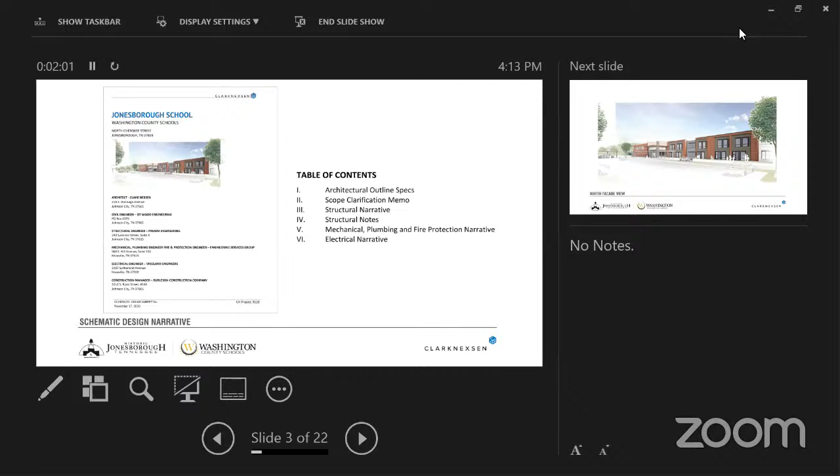Can you go to the next one, Shelby? Okay, this is the north facade exterior rendering that I think we showed you last time. It helps you see the shape of the building and how we tried to copy downtown Jonesborough, the way the buildings are offset and some taller than others - we tried to incorporate that. The shape is good. We're still working on some details like brick patterns and the cornice detail at the top, and we'll be developing those as we go into design development.

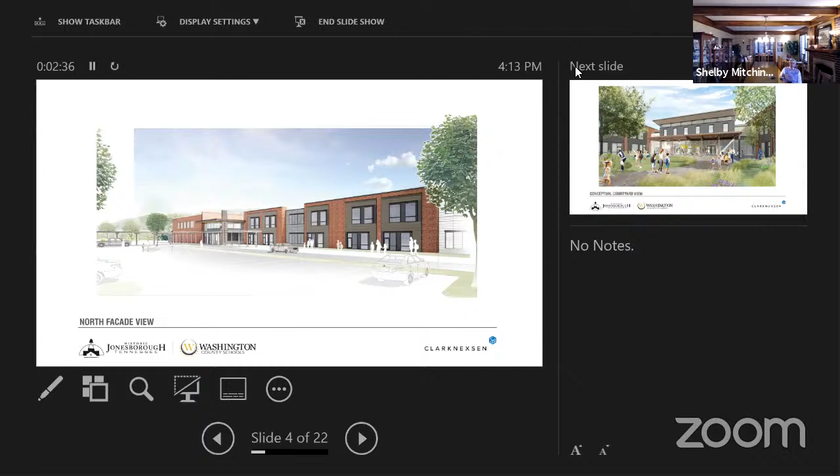Next, this is the courtyard rendering that we've shown you before, to show that the courtyard will be used for activities, teaching spaces, learning spaces. Those are not weeds that you're seeing that it's overgrown - we're using sustainable design, which Jonesborough has done a remarkable job using, and we intend to use sustainable design in landscaping for the school.

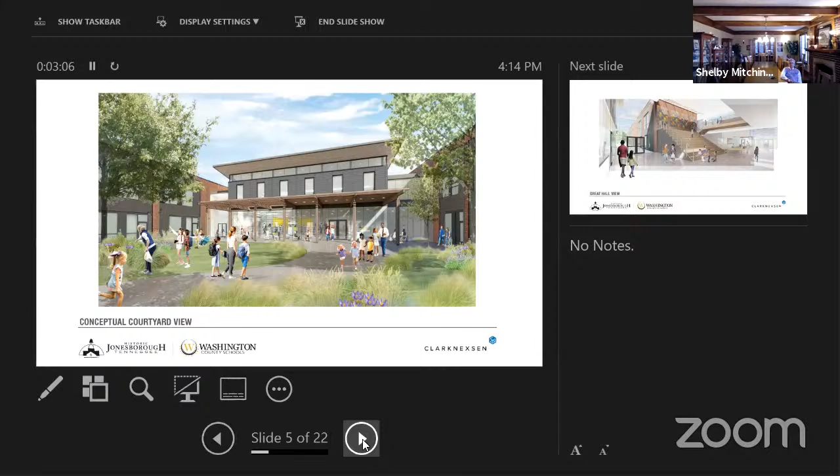Next, this is the Great Hall view that you've seen before. To give you a little input on the elevated section there, we're actually calling it similar to courthouse steps, like you'd see at the courthouse downtown. We've gotten feedback from Jordan Hughes, the principal at Boones Creek School, and from other schools, and they have high praise for that aspect of the design. They use it for a lot of events, and it can also be used after hours for community use. You might notice the colored pieces at the top of the bleacher or courthouse steps - those are acoustical panels. We'll be using acoustics in this area so you can have an event there even during school hours without it bothering the rest of the school.

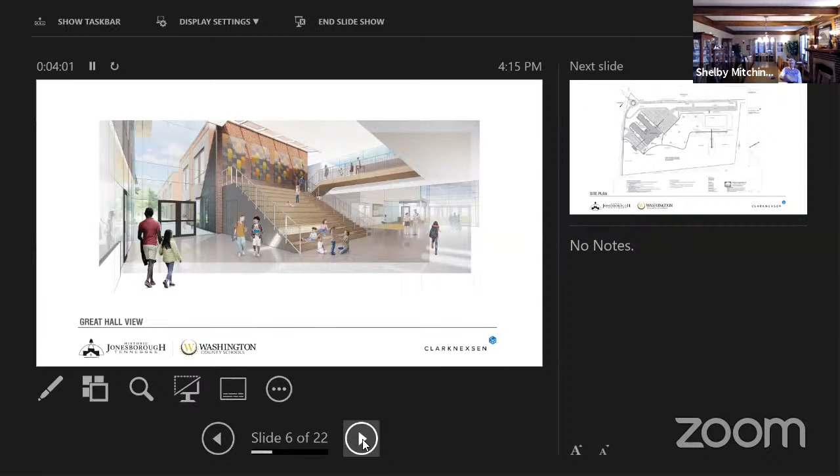This is the overall site plan. We're just now getting into developing it, but we wanted to show you this is the basic layout that we'll be using with the school, the parking, the access, the athletic fields, the agricultural building, the trails and so forth. And we're very happy to let you know that at this point, there are no retaining walls at all in the development of the site.

Also, it's probably a little difficult to see, but we did rework the entrance drop-off drive to line up directly in front of the front door. So we're now getting ready to go into full development of the site plan in this next phase.

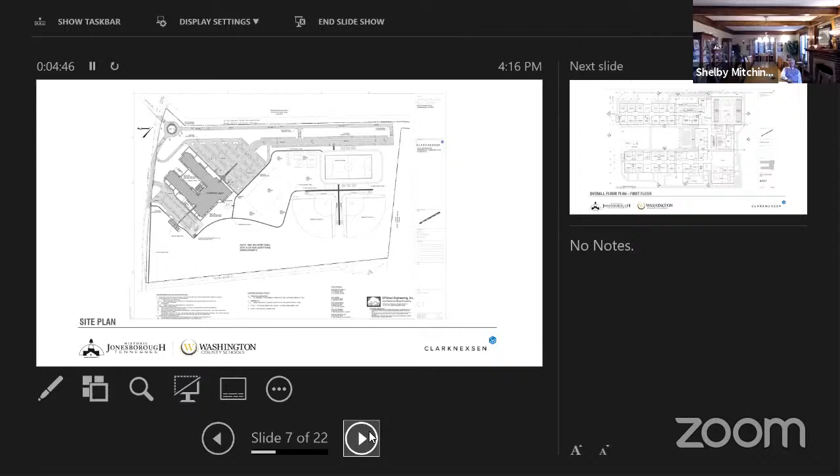This is the overall first floor plan of the building. We wanted to show you this one. It's a little more difficult maybe for you to read, but we wanted to show you what goes into a working type drawing of the floor plan with the column lines on it, dimensions on it, section marks, elevation marks, and so forth. So we're just showing you this to show you how we develop the floor plan as we get into the hardcore drawings.

We will be able to explain it a little further when we get to the colored floor plans in a few minutes. They're a little simpler to read.

This is the overall second floor plan with the same markings on it to just show you what we're putting on the floor plan drawings when we put it out for bidding.

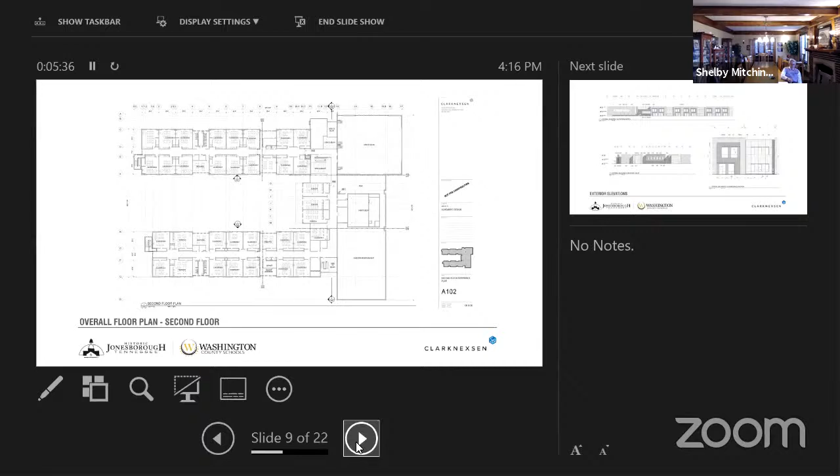This is the exterior elevations of the building. Again, it's a little more difficult to read than the colored renderings, but again, it just shows we put the column spacing and the bays, we put dimensions, we put additional information that helps the builders when they look at it to be able to price it and see what sizes everything is.

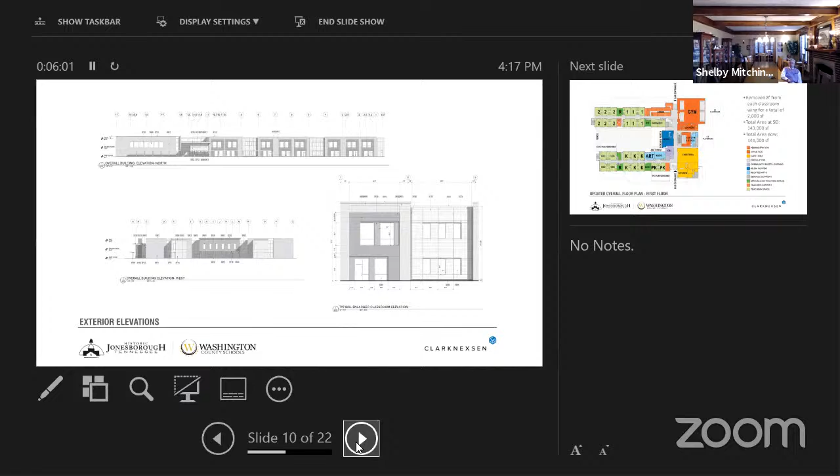This is the overall first floor plan, and it's in color. It's a little easier to read. Since our last meeting, we were able to remove 8 feet from each classroom wing. That saved 2,000 square feet. So now, instead of having 143,000 square feet, we now have 141,000 square feet.

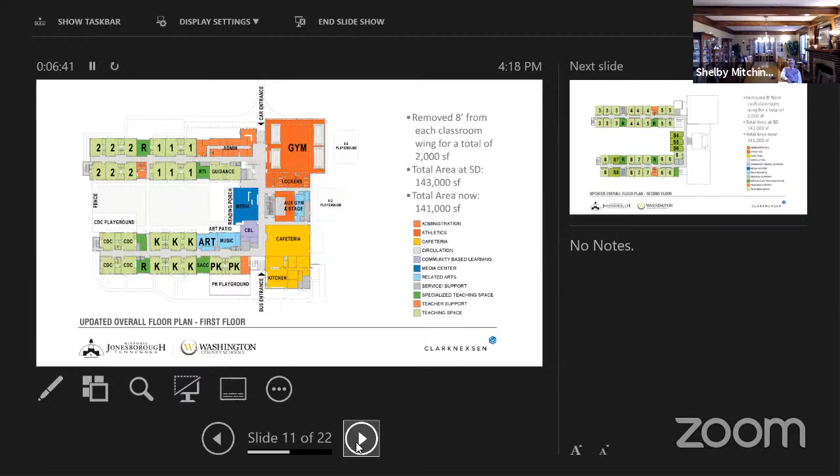In a few moments, we'll show you how we were able to do that and still keep the same teaching spaces in these classrooms. But this is what the overall floor plan looks like on the first floor. We tweaked it somewhat, and we'll show you more of that when we get to the enlarged sections.

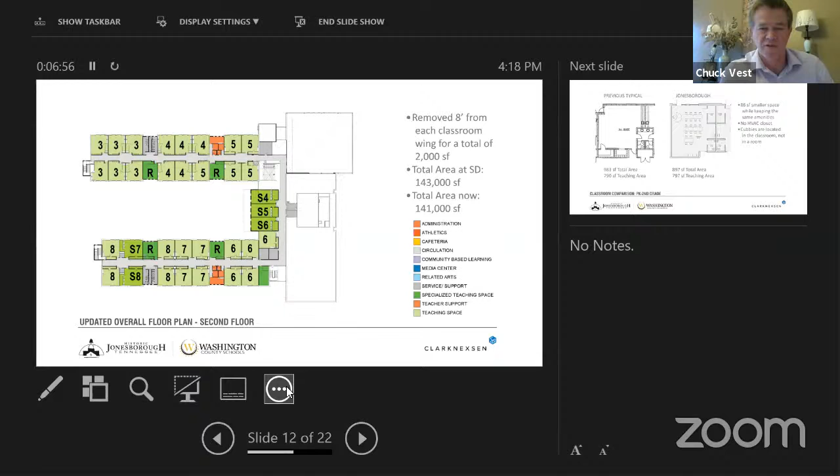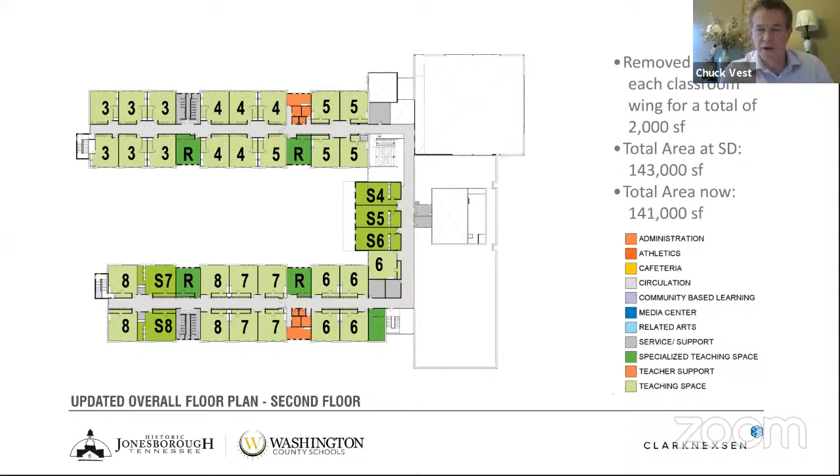And again, this is the second floor wing. Overall floor plan shows how we tweaked it, and it shows the same savings, because when you save it on the first floor, you also save it on the second floor.

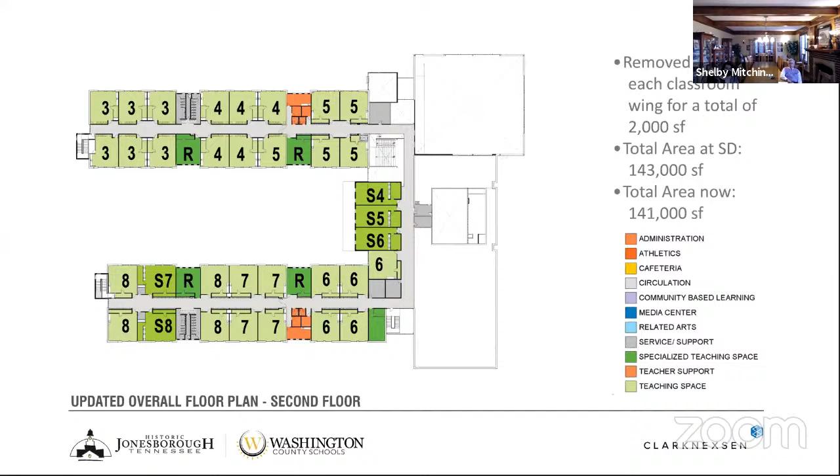We wanted to talk a little bit about the classroom comparison. The one on the left was Boones Creek School. First of all, I want to say this in no way is being critical of Boones Creek School. We're just using it as a comparison because it's the last school that was built in Washington County, and it is an excellent school and an excellent design. We're just trying to see where we could save money in some sizing and sizes.

And if you'll notice on the left, that has 983 total square feet, and you have 790 square feet of teaching area. We reworked it to the one on the right that is now 897 square feet total area, but the teaching space went up to 797 square feet of teaching area.

The reason that we could do that is that the HVAC closets or rooms that we had on the left next to the toilets, we were able to eliminate those with the HVAC system that we have. We also took out the wall at the cubbies so that those cubbies could be right directly into the classroom. And without having a wall there, we gained some space, and it allows the instructor or the teacher to observe that more closely instead of letting them get behind the wall.

Something else that helped us in reducing the space is the thickness of the walls. By going to the drywall system, metal studs and drywall, our walls are not quite as thick as those with masonry. So all of that combined, we were able to reduce square footage and yet have more teaching space, the same amount of storage space. We also gained a little space by the individual toilets opening into each room rather than opening into an access way or hallway for the toilets. We feel this is a very good design that helped us reduce the square footage.

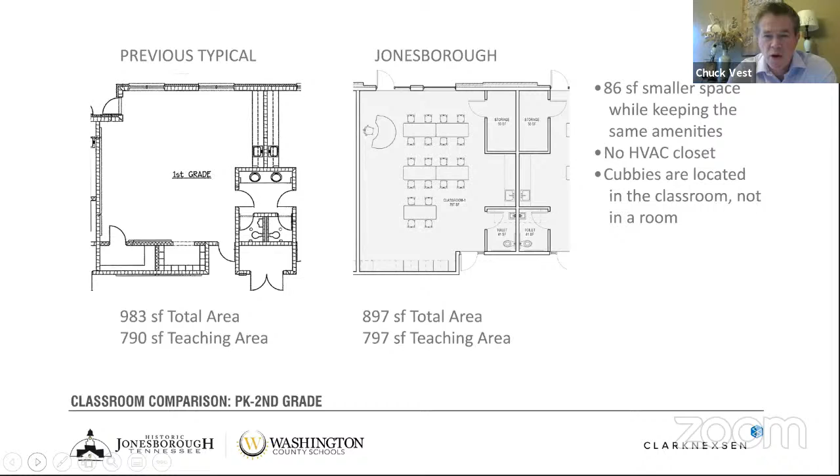That's a good point, Rob. Thank you for that. Ken, let me say, you and your whole team, it's these type of things that are really impressive. But switching to that damage-resistant drywall, does that have some acoustic positives as well? Because I know when walking through some of these schools that are mostly cinder block, it just seems like the sound echoes. Is this drywall system really going to improve in that area?

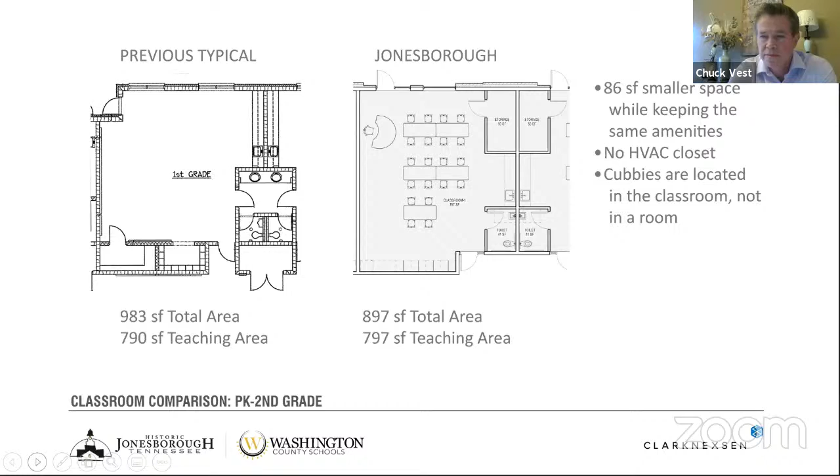Yes, it will increase the acoustic value of the classrooms. We also are putting insulation in those walls to even help further with the acoustic value. So we have improved the acoustic value.

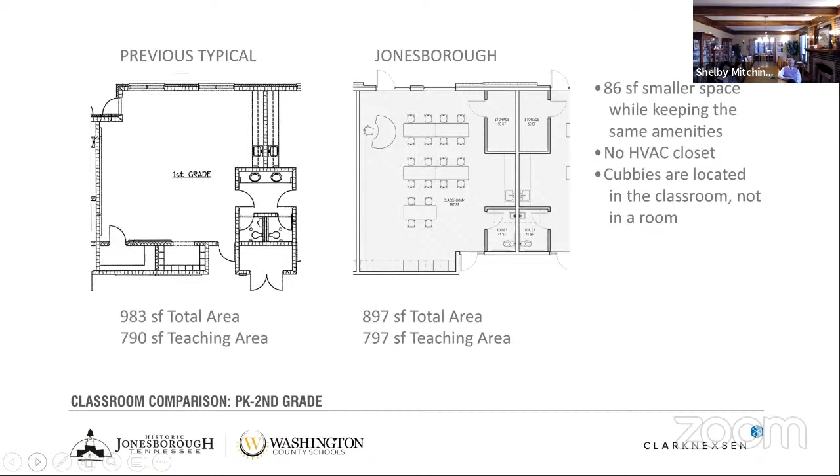This is the classroom, first floor, the first and second grade units. As you can see, they're very simple. We did do a layout of the desks just to show that they fit. We will work with the teachers as we get further into it about the exact arrangement of the desks and the teacher's desk and so forth, but just to show you that it works. The spaces are pretty similar now, except we refined them, improved them. And we did put the corridor in the middle there going to the courtyard, which will help the teachers or administration cut through to the other wing without having to go all the way around the building.

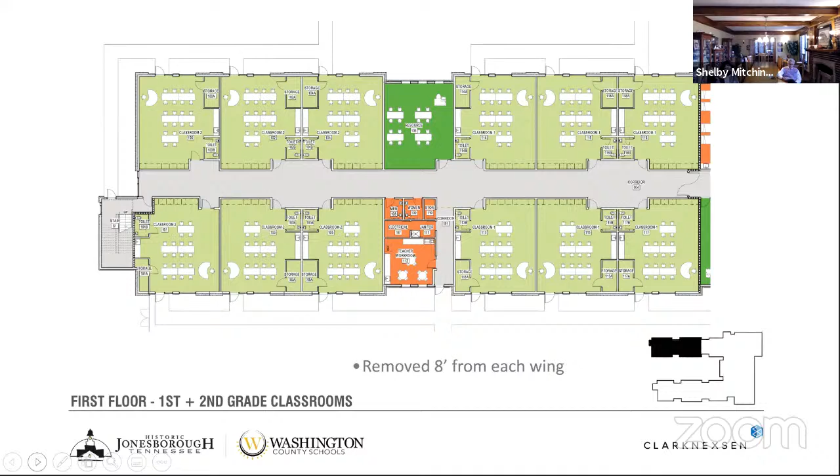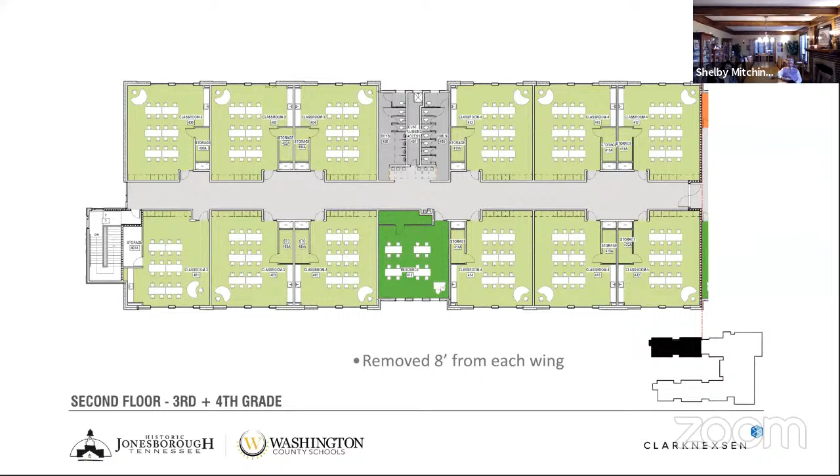Next, this is the second floor, the 3rd and 4th grade. Again, you can see how simply it's working out, how well it's working. Basically, we've simplified it, improved it, and took 8 feet out of each wing. This is

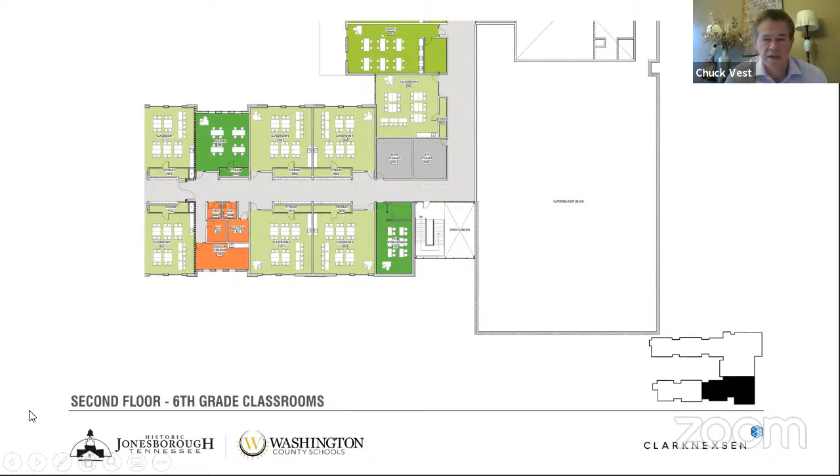Hey Ken, do you mind if we stop right here and ask any of the members if they've got any feedback on anything they've seen so far? Sure, that'd be fine. Okay members, does anyone have a comment or a question on what you've seen so far?

I've got a question. Can y'all hear me okay? Yes. Okay, sorry, I've had audio issues before. I know we talked 2 or 3 meetings ago about the possibility of moving concessions to where people working concessions can actually see the ball games and stuff like that. Have you guys looked into doing that with any of these designs and updates?

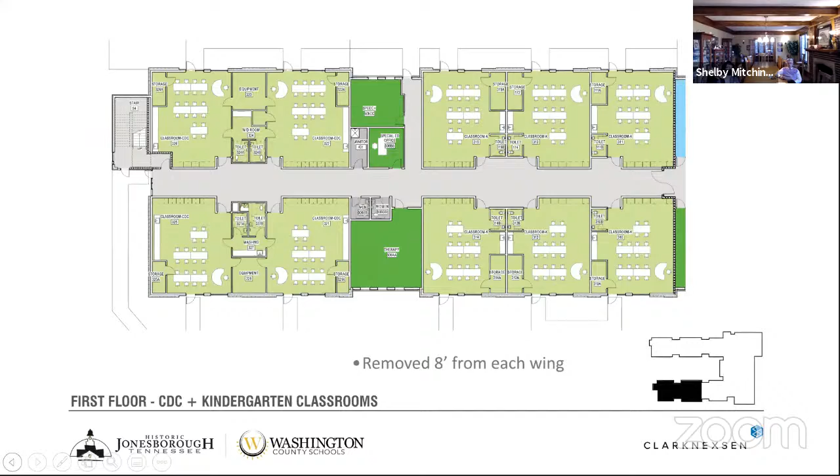Hey Brian, I want to add something to that. We did ask the two athletic directors, Danny Good and Josh Kite, about that issue, and their comment was that most of the time it's the kids, the students, running the concession stand. So that was the feedback. When we talked to them about it, they didn't see that it was that much of a concern, and they said a lot of times they just have students in there that aren't paying attention to it anyway.

So, I can tell you right now, that's not accurate. Laura can back me up on this. We're having trouble right now just with the basketball season getting parents to run concessions, mainly because they cannot see anything. You don't let 11, 12-year-olds run your concession stand. That might be the case in high school, but not in middle school. Okay, I'm just telling you, that was the conversation we had. No, that's not correct. Okay, that's when the end user sometimes knows a little bit more.

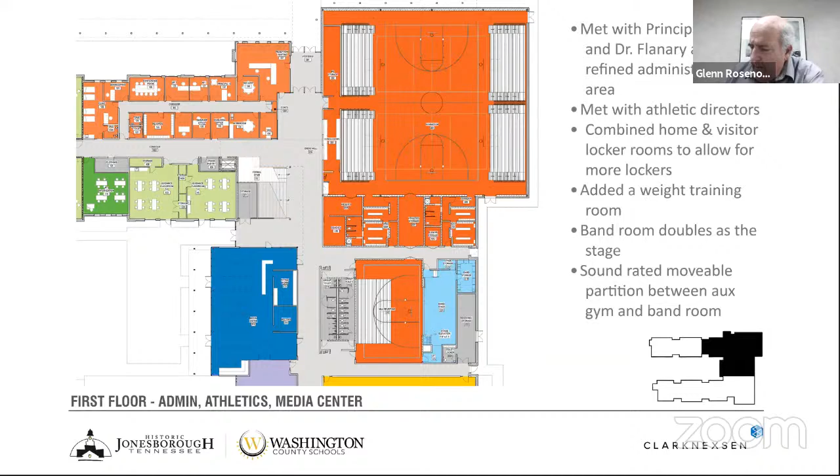Well, that may be something we could explore, just looking at a way to do a good video of the game and have it be able to be seen from the concession stand. It might help just to know when there's breaks and stuff like that as well, if you're inside the concession. We will look at that and see what solutions we can come up with.

Hey Ken, is there still storage underneath those bleachers? I know that was something I think you talked about. That area there with the arrows, that's still storage right there, in addition to what's on the other side, down in the locker room areas. Very good.

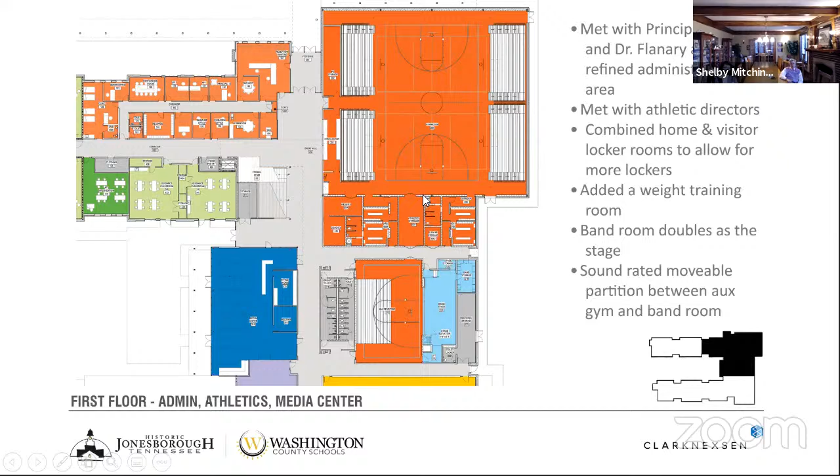Okay, let's go back, Shelby, to the second floor of the 5th grade and science.

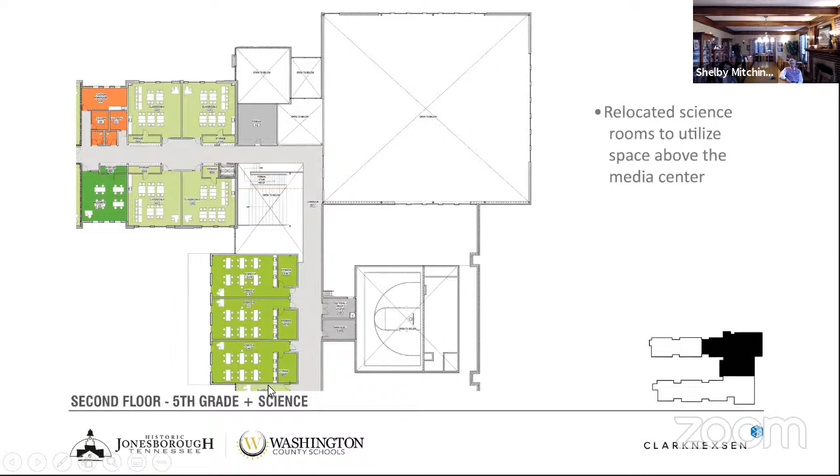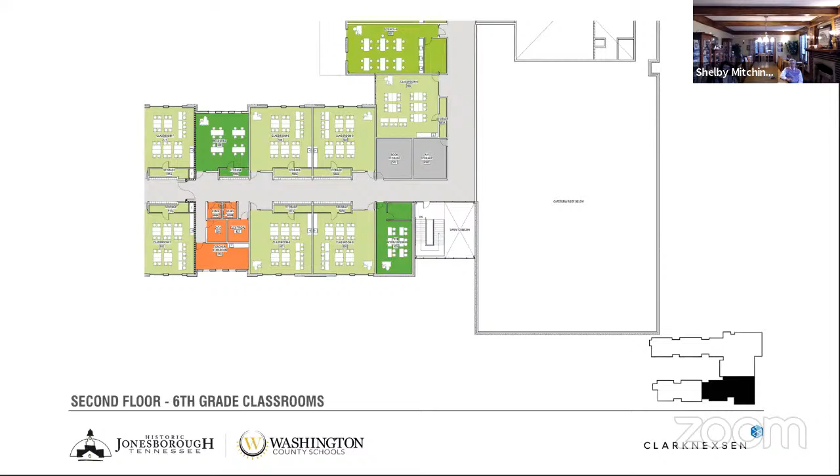And then this is the 6th grade classroom layout with the different usages that we have there. That works very well, and we think everyone will be happy with that. We only made a few minor adjustments when we cut the 8 foot out of each wing.

Now, we hurried through that to make it brief so we didn't tie everybody down with all of the details. We hope everyone got a chance to look at the documents that were sent out. We had hoped if we had a live meeting, we were going to bring a large set of the documents so you could see it and thumb through it. But as you look at it, if you have questions, feel free to give us a call.

At this point, if we get the approval for the schematic design, then our next steps will move into design development. That's where we will start doing things like refining the brick details on the outside and selecting the exact materials for the finishes, doing the landscaping, the athletic facilities and courtyard, and all of the different systems, structural, mechanical, electrical, and plumbing. We'll start refining those.

And then we will have additional meetings. We have met with a lot of people, but we will continue to meet with people like the art and music teachers, the librarian, CDC, technology, Curtis Fulbright, and all of the others, and try to improve the kitchen equipment layout and confirm the details of the scope document that we've sent everyone.